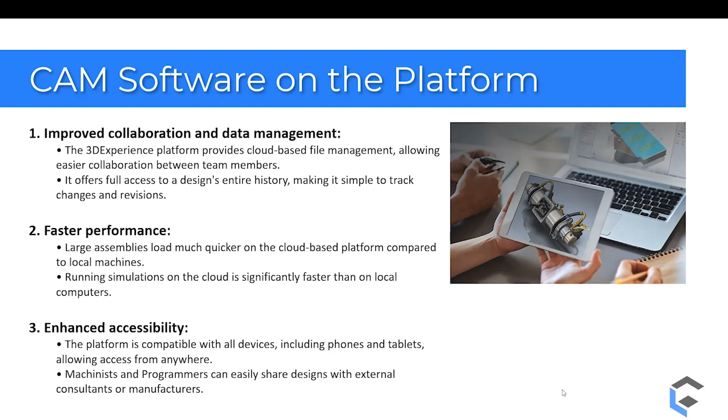So I've got a really quick video here talking about 3D Lean, which is one of my favorite collaboration tools on the platform. This is extremely helpful for any company out there doing any kind of manufacturing, engineering, or design. This tool is super helpful, and I think all companies can benefit from it. So take a look at this video.

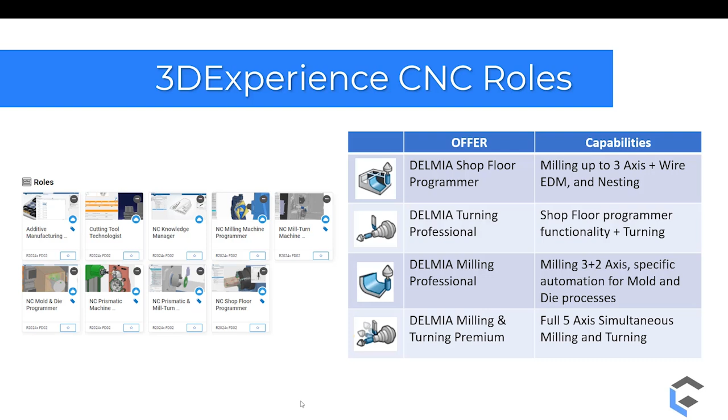They've also created some packages they call offers, which are more affordable but combine multiple different roles. Delmia Shop Floor Programmer is that first package. Then we can go up to, say, Turning Professional if you're doing more turning, a Milling Professional package with 3 plus 2-axis and specific automation for mold and die processes. There's also the Milling and Turning Premium, the full 5-axis package, which includes basically everything. So multiple different offers or packages for the 3D Experience platform.

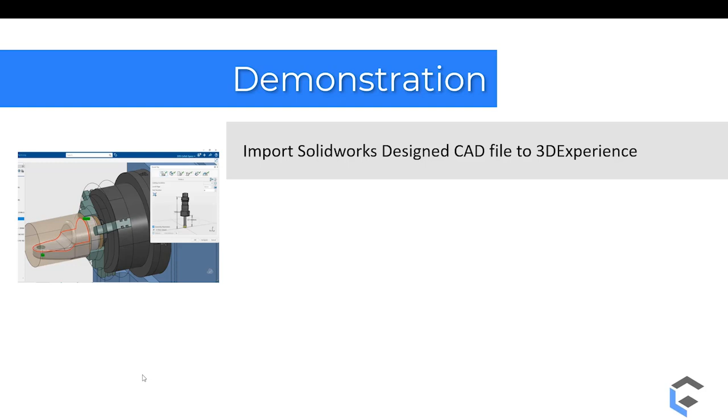And now we'll hop into the demonstration. We'll show the import from a SolidWorks design CAD file to the platform. Then we'll program the part using the NC Shop Floor Programmer role, and then we'll post-process to the CNC machine.

I've gone ahead and opened the part that we're going to program inside of SolidWorks. This is going to be saved onto the platform, and then we'll use Shop Floor Programmer to program the part. The first thing I want to do is save this. You'll notice I have the Lifecycle and Collaboration tab open inside my Command Manager, and I've also got the 3D Experience tab open on the right here. So when I choose my add-ins and choose 3D Experience, this is where I'm going to see that.

So when I want to save this, I'm going to choose Save with Options here on the top. Again, there's the same buttons down here in the bottom of this tab. It's going to go ahead and extract the file information, and it's going to bring up my options page. I'm actually going to save this to a bookmark so that it's a little bit easier to find once I get onto the platform.

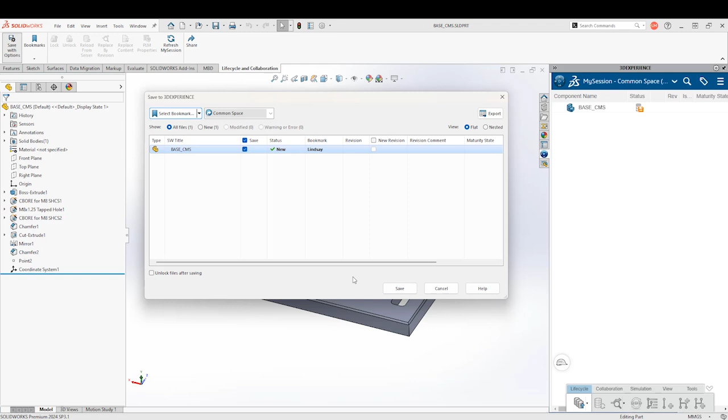So we've got my file added in. This is actually where I could create a new revision. This hasn't been saved to the platform yet, so I'm not able to create a new revision. But if I was to come back and make some changes to the part, I would just check this off and it would create the revision for me. So I'll save that to the platform.

You'll also notice that I've added a coordinate system onto the part. So if you know where your work offset is going to be, or any coordinates to locate the part, I highly recommend adding those in the design first, and then we don't have to add it in later.

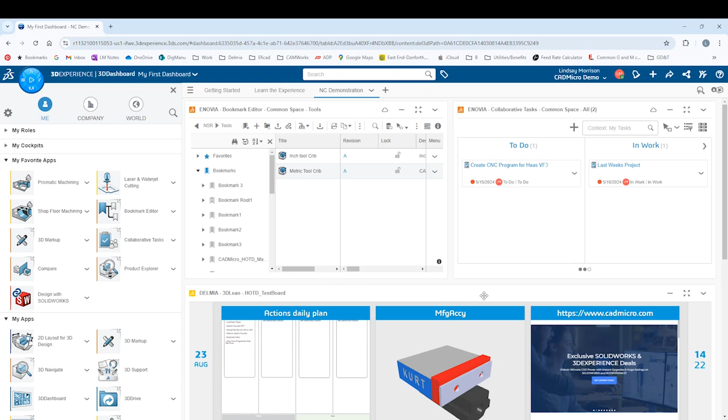So let's switch over onto the platform. I'm just bringing up my browser and I've opened up 3D Experience here. I've got my bookmark editor open. If I scroll down here and go to my bookmark, we should be able to see our part located inside the bookmark. I didn't lock my part from SolidWorks, so you can see that it's not locked.

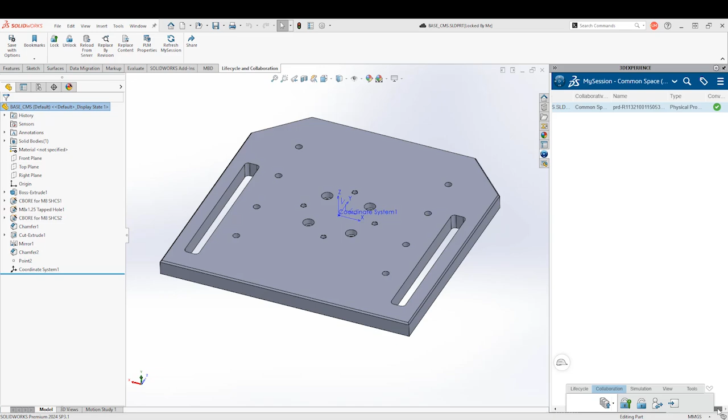I have the lock key here, and I can also lock from above. I'm going to go ahead and lock that. You can see there's the key there. If we scroll over here too, you can also see the little check mark showing that it's been updated. If I come back into the platform, I'm going to refresh, and we should now see that this part is locked. Again, any changes made inside of SolidWorks will also reflect onto that part, and it also shows the revision inside this window as well.

I've also got my tasks open on the right-hand side here. So you can see I'm currently working on last week's project. That's now completed, so I can just drag that over into the completed area. I could also open that up and maybe move it to approval. There's a whole bunch of different options within the tasks as well.

I'm now going to create my CNC program. So if I go into information, we can scroll down. This is the task that's been created. It's currently under to do, and I'm going to attach that file here. So I'm just basically going to drag my base file into the attachment.

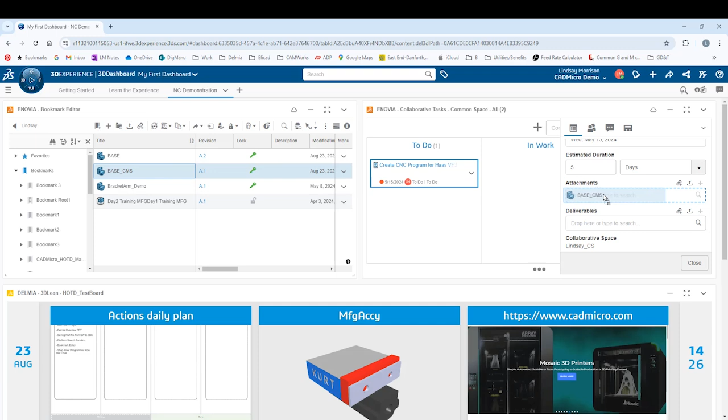And now I've got the actual part file in here. So this is where I can take a look at what part needs to be programmed, and I can actually open that directly into my app. So I'm going to go ahead and save that. You can see under members that it has been assigned to myself, so I need to program that.

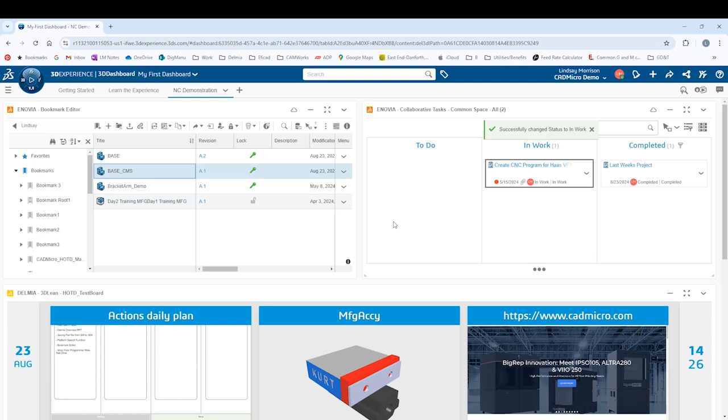Okay, so now I'm going to move that over into work, and now I'm going to work on that project. The next thing I'm going to do is open my shop floor machining app. I'll just click on shop floor machining, and that's going to launch the shop floor machining app.

And the app is now open. I've just moved it onto the side of the screen because I'm going to add in my machine that I'm going to work with. So I'm going to locate the NSR folder that I've got created here, and I've got some machine templates available.

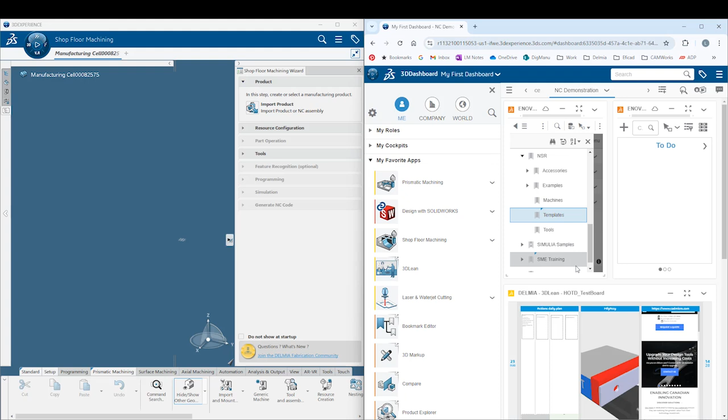So we can open this up a little bit larger so that we can see what we're doing here. Then I'm going to go ahead and use my 3-axis imperial machine. I'll go ahead and drag that into my manufacturing cell inside of shop floor machining, and that's going to hold my machine and my tools.

This is a template we've created to hold all of the necessary objects that we need to program this part. This machine is not going to be visible - it is just a generic machine that we've created. However, you can create the actual machine, with all of the CAD files in there so that you can view the machine and everything that is included with it. We can also add in fixtures, your vise, the table, all of the components that you would need on that machine to be able to simulate and view the actual program running inside the machine.

So the next thing that I'm going to do is open up the actual app. Here's my app in full screen. You can see in here we've got the machine, we've got the tool crib. I can open this up and see all of the different tools inside here.

Then what we're going to do is import our part file, so I can use the shop floor machining wizard on the right hand side of the screen here. This is a really helpful tool for new users - it will go ahead and list all of the different processes that need to be done in order to complete the program. So the first thing would be to import the product, which is the actual part file that we're going to be importing.

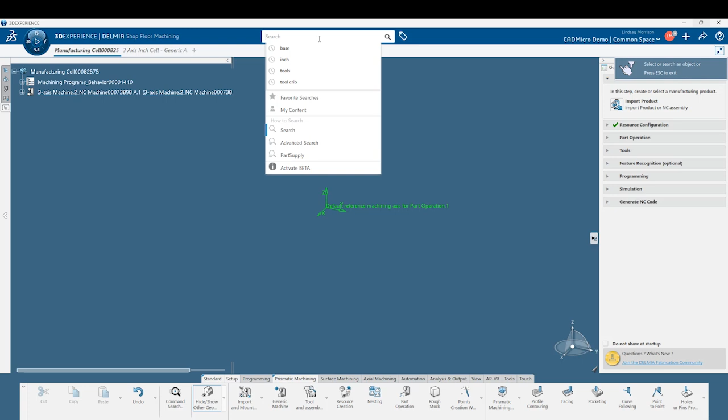So we can click on that button. It's looking for a product, so I can either search in the top search bar here, or find it from my bookmarks. What I'm going to do is use the search bar, and this was called base CMS. So there's my part, and I'll go ahead and open that.

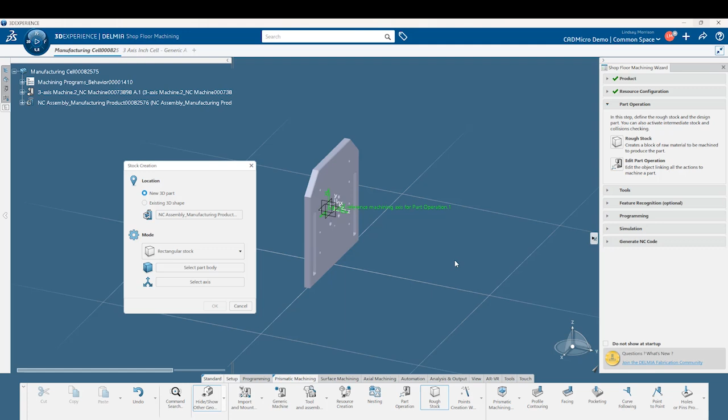So now that I've added my part into my program, I'm going to go ahead and set up my stock as the first step. You can see that there's a rough stock button at the bottom here, and that's the next operation that I need to make. So I can choose rough stock. This is basically going to either take a look at my part and put a bounding box around it, or we can bring in another body, whatever we need to use to create the stock.

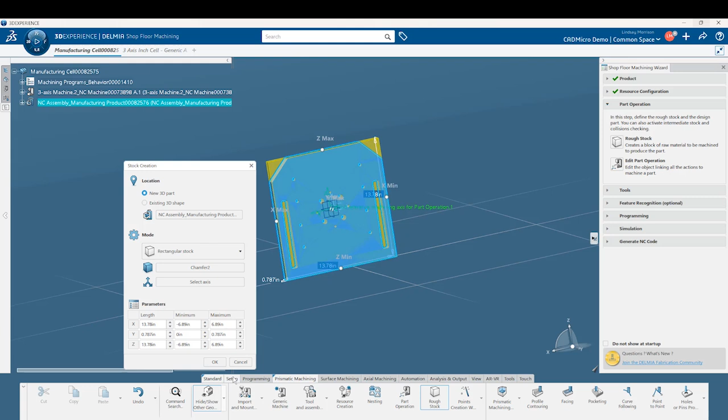I'm just going to use the bounding box, so I'll go ahead and choose select part body. I click on the part body and then I can adjust the parameters to the size of the stock. I'm going to leave that as is and we'll go ahead and choose OK. Once I've done that, you can see that I've created the stock inside my assembly manufacturing product, which is the part - those are associated together now.

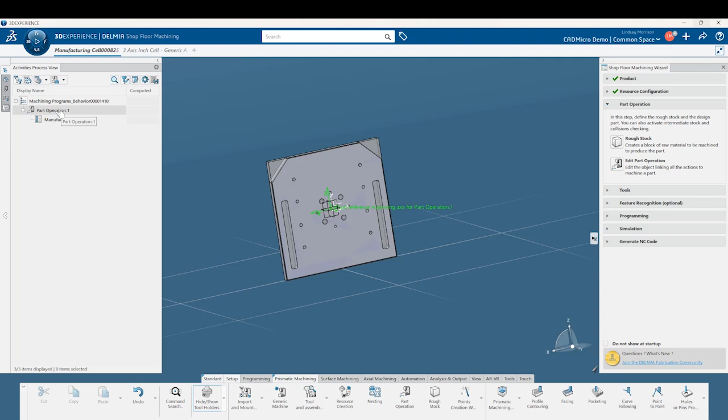And then the next thing I want to do is come into my part operation here, and set the stock and the part itself up inside the part operation, as well as the work offset. We can double click on part operation 1. I'm going to choose my assembly manufacturing product, and everything that has a check mark has already been selected. So we can either change those options or just fill out the rest of the things that need to be done.

You can see the design part and the stock have not been selected - there's no check mark beside them. So I'm going to start with the stock. I'm going to click on the stock on the screen, and now you can see there's a check mark beside my rough stock. In order to select the actual part file, I like to hide the stock, so I'm just going to choose my hide show option here. We've hidden the stock, and now we can click on design part and choose that as our design part.

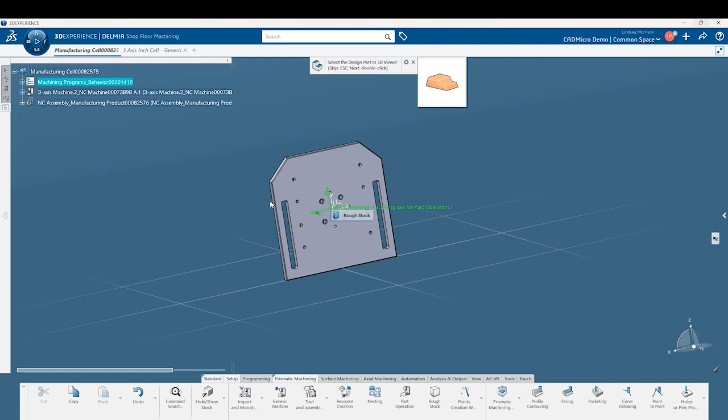If we had any fixtures, we can add those in as fixtures here. We can add a safety plane, so I can choose that top face and say maybe 5 inches above that face would be my safety plane.

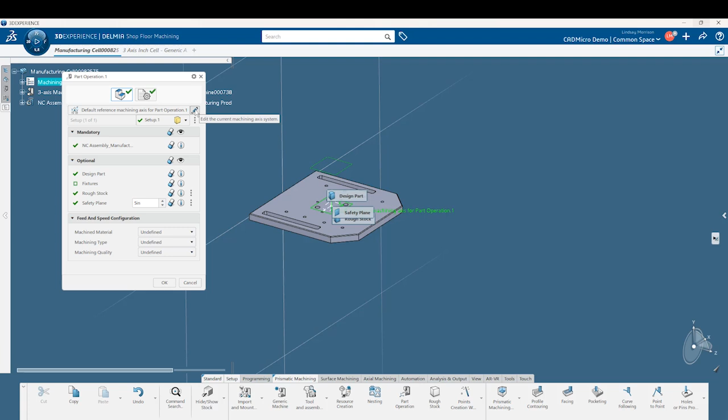The next thing that I want to do is actually set up my machining axis. So I'm going to choose that. We'll choose origin, and I'm going to choose the axes that I had created inside of SolidWorks. So I just want to zoom in here and click on the axes. Once I've got that set up, I'm going to press OK, and we've set that as our machining axis for our first setup.

If we needed more setups, you can see there's a little setup drop down, and we can actually add in more setups here. So I'm going to go ahead and call this my G54, and I'm going to choose OK.

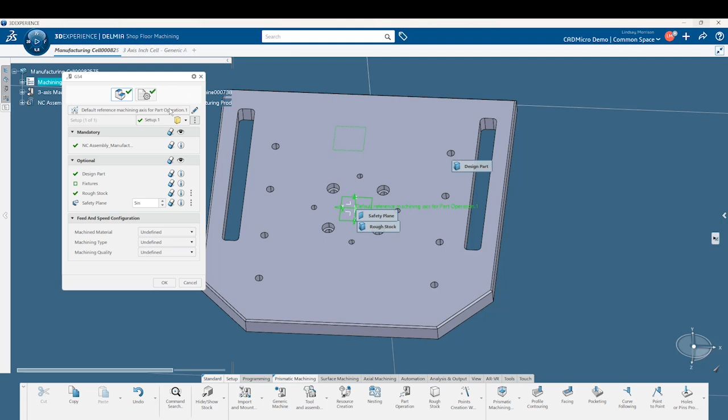Now that I have my coordinate system set, I'm ready to add in my toolpath. The first thing I'm going to add is a pocket, so I'll create a prismatic machining toolpath. You can see we've got prismatic, surface machining, a whole bunch of different toolpaths in here, and axial, which would be more of the drilling. So inside prismatic machining, I'm going to add in a pocket.

It's going to ask me which tool I want to use. Automatically it will bring up my tooling list and allow me to choose a tool. This is end mills, and I'm going to choose my 3/8 end mill.

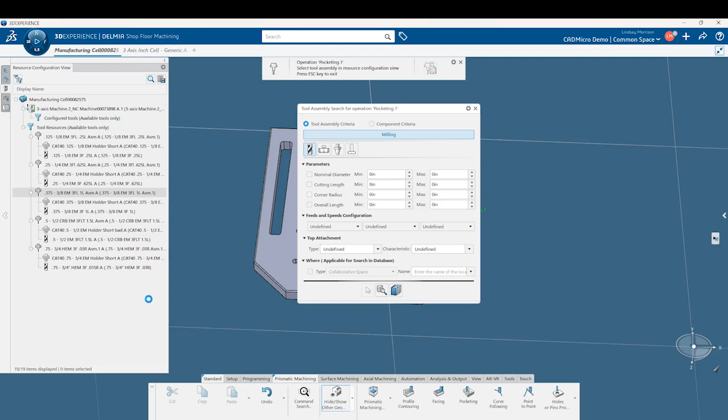Then it wants me to select a contour, so I'm going to select the bottom contour here. And then I want it to wrap around, so I'm going to click on and navigate on belt of edges, and that will close the contour. Then we can go ahead and choose the green check mark.

Now I've got my toolpath window that's going to open up. The first one here is the actual tool, so this is the resource that I've selected. You can see the tool preview in here.

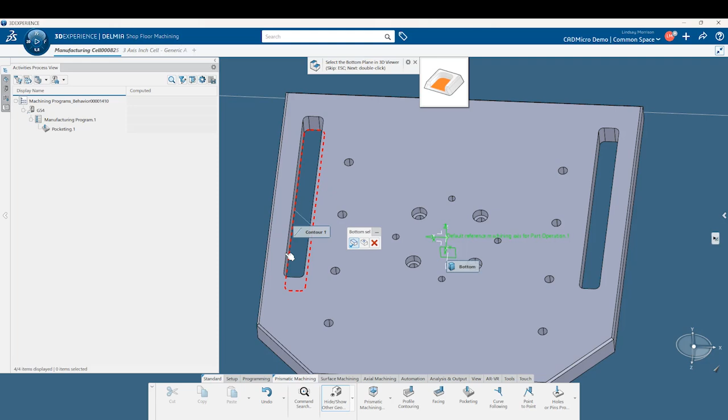We'll go into the geometry tab, and this is where my bottom plane would be selected. So I can click on that. I'm at the bottom face of the part.

You can see I've chosen my contour. We've got the tool axis and which direction it is, the start point and end point of the toolpath. We also want to set the top plane, so where the toolpath will start cutting. There are a whole bunch of different settings within this window and lots of different options that we can choose from.

So this is a closed pocket. The bottom is either hard or soft. We can come into our strategy tab as well.

You can see inside the strategy tab is how we actually want to program this toolpath. So is this going to be in a helical motion? Is it a kind of zigzag back and forth motion? How do we want to cut this?

As you can see, there's also tabs on the left-hand side that we can click through and adjust different settings in here as well. So if I want multiple depth cuts, I can say number of levels and maybe set this to 3. Once I've got the settings that I want to start seeing, I can press display and you can actually get a nice little preview of what the toolpath looks like so far.

That's the levels, and then the next one would be if I wanted to add in a finishing pass. We've also got high-speed machining toolpath settings. If we go into the next tab, we've got tool axis settings, collisions, and kinematics. Inside macros, this is where we can actually adjust how we want to approach and retract from the part.

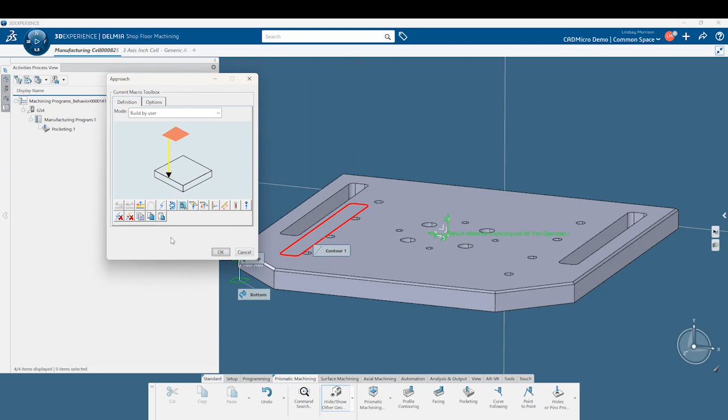So this one's currently set as build by user. If I go to edit here, I can actually build an approach strategy and how I want to approach the actual pocket. So this is currently just doing a plunge in. I can go ahead and manipulate how I want to actually set this up.

You can see I can add in, if we hover over it, it says add motion to align, add distance, axial motion. Again, we can add just by clicking on it, and you can add distances in here. You can add helix. There's a whole bunch of different options in here.

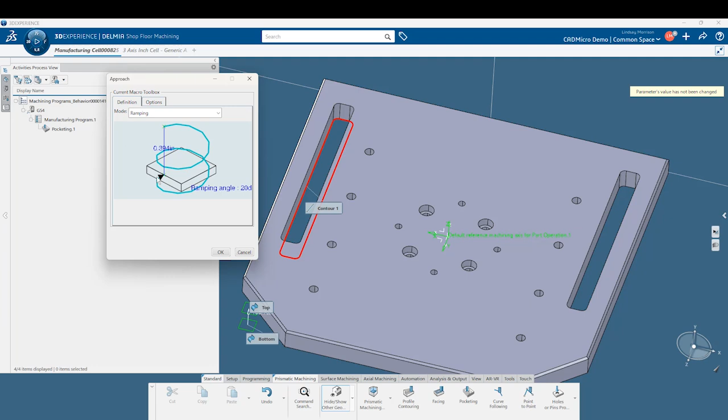Another option would be to drop this down and use different parameters. So in this case, I could press OK, and now I'm using a ramping approach, and then I've got a retract in here as well. So we can press display, and we can see the ramp motion on the entry.

The next tab here is the feeds and speeds tab. This is where you enter all of the feeds and speeds for this toolpath.

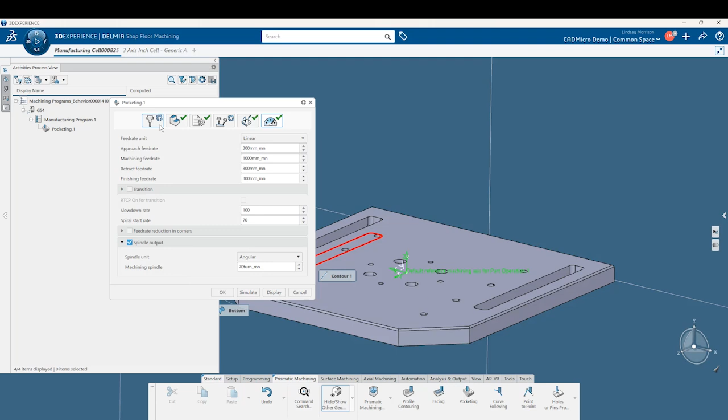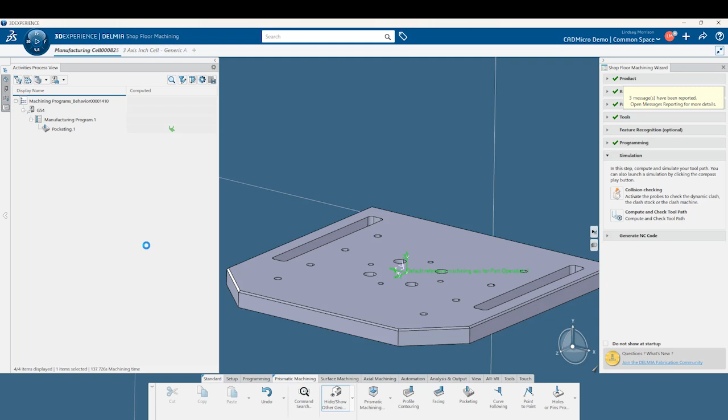Once we've got the toolpath created, we can press OK, or simulate directly from the toolpath. You can also right click on the toolpath and see a whole bunch of different compute options, which will generate the toolpath and also simulate it - compute toolpath, compute and check toolpath, and view a quick simulation of the actual toolpath.

I can play through this, and it might go a little quick, but I can always slow down the speed. I can also just drag it through and show the first pass, second pass, and third pass on that pocket.

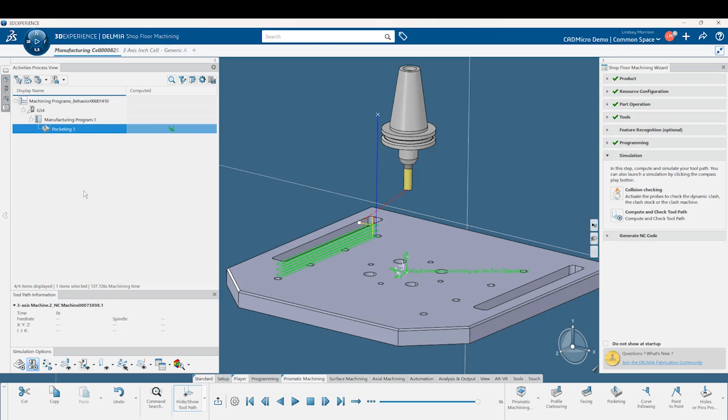If I'm happy with that, I can copy it and paste it on the next pocket. I'm going to highlight it in the list here, and you can see on every tab there's a cut/copy option, so we'll choose copy, then select it again and choose paste, and it will paste right underneath.

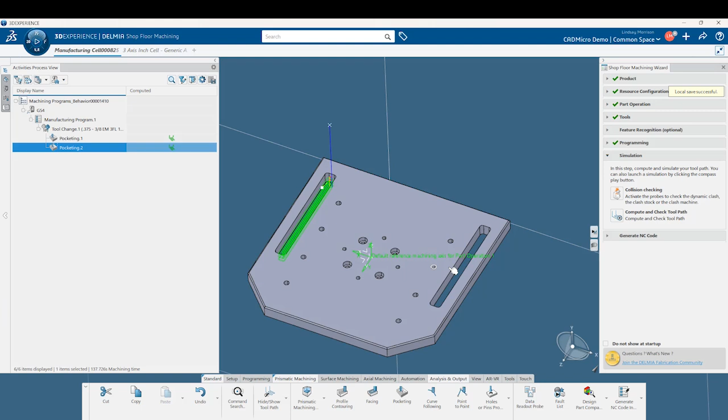It's going to use the same tool to create the second pocket. All I need to do is move it over to this pocket instead, so I'm going to double click on the pocket.

I need to change the contour, so I'm going to erase this, removing the contour selection currently in there. I'll choose contour again, and now I can select this contour instead, navigating on belt of edges to select the whole thing.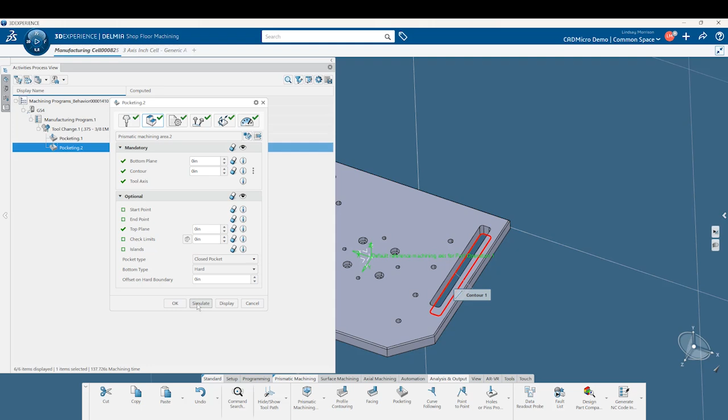The bottom plane and the top plane will be the same, and I can either display, simulate, or press OK, then compute and check toolpath. It does its rapid move in, then the ramping motion, and cuts the first one again.

The next thing I might want to add to this program would be the drilling operations. We can go into axial machining, and you can see I have drilling here, with an option right beside it for automatic hole search. You can also see feature recognition for other machinable features.

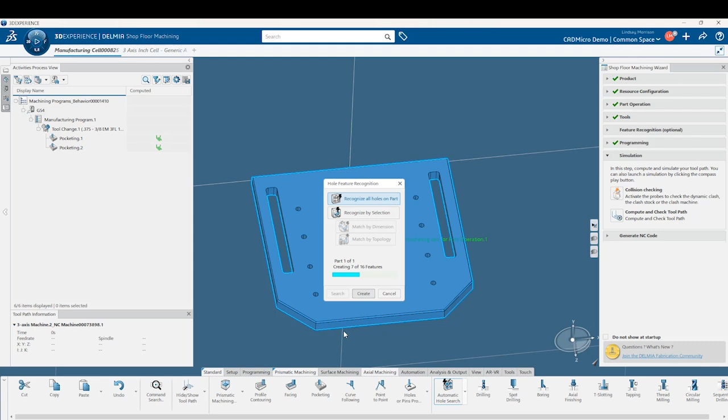In this case, I'm just going to search for the holes, recognizing all holes on the part. I'll go ahead and search - it's found 16 holes. I'll create those features: 4 simple holes and 12 complex holes. We'll choose OK.

Then it filters out the actual holes in the window here. I'm going to select the last toolpath in my tree, choose drilling, and then select the holes - I'll come in here and select all 4 of these holes, just the simple holes.

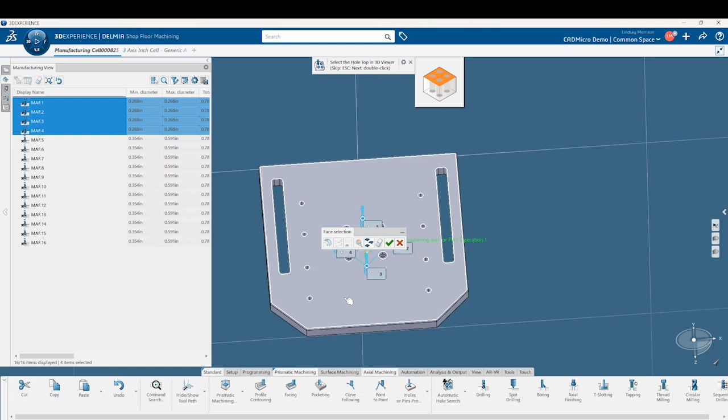Then I'm going to choose which surface is the hole top. I'll choose this top surface, choose OK, check fixtures, and then choose the hole bottom. I can choose a whole bunch of different parameters - this is a through hole, this is the diameter, and I'm going to choose a different tool.

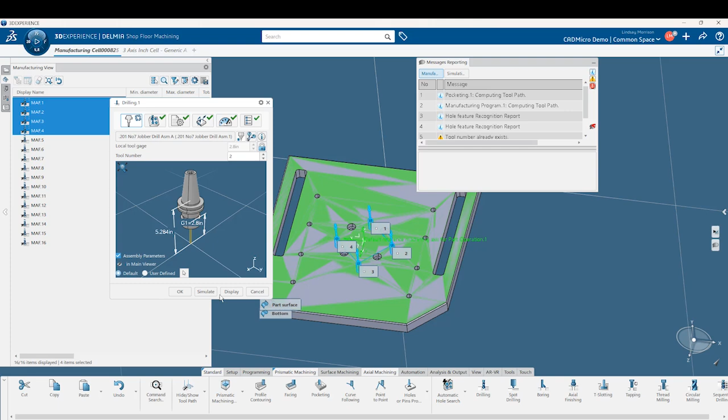If I need to make any other changes to the toolpath, I can do so in here. We'll press display and should see our 4 drilling toolpaths. We can also simulate and view the drill toolpaths, and once we're happy with that, we can choose OK.

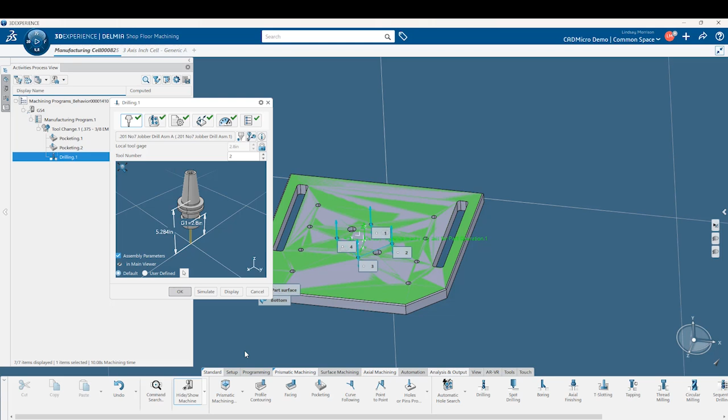Now we can see we've got tool change 1 for our 2 pockets, and the second tool change to the drill for our drilling toolpath.

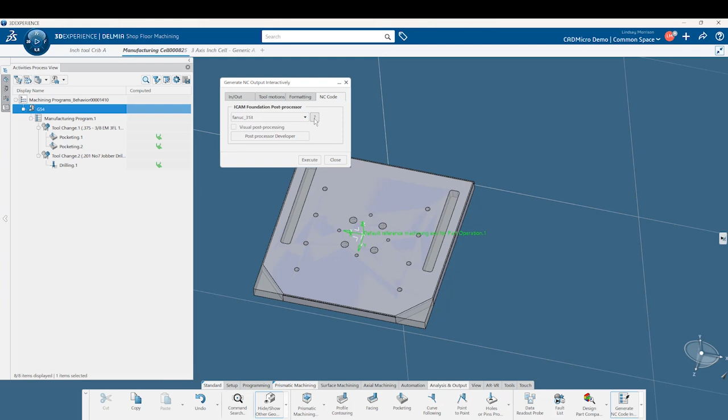At this point, I might want to post-process my program. I'm going to go into the Analysis and Output tab, and you can see I have the button for Generate NC Code. I'll come into my NC Code tab and choose the post that I want to use with this one, then go ahead and press Execute.

You can see all of the files that it's created - this will be my NC code. I can open that up and we can see my G code that's been created.